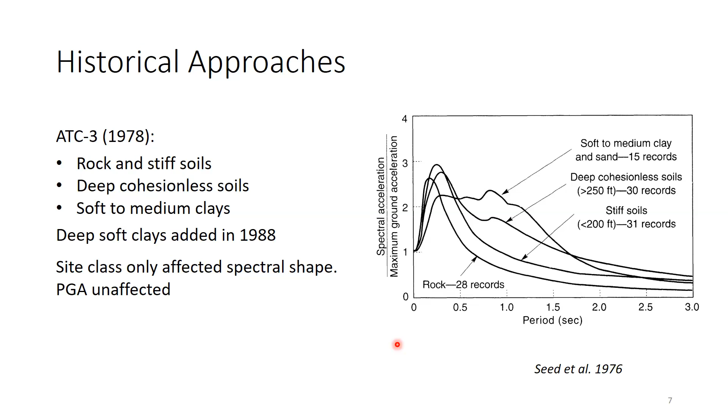A number of problems with that were understood as time went on, and a major update occurred in 1994. The Loma Prieta earthquake, which had happened in 1989, was a major motivator for revising and improving our seismic codes. In this 1994 NEHRP Provisions, VS30 was introduced into US practice.

The original idea for VS30 and the motivation for looking at it came from the US Geological Survey. Bill Joyner was a major figure here, also Roger Borcherdt. I'd like to take a moment to define VS30, because sometimes details of its definition get confused.

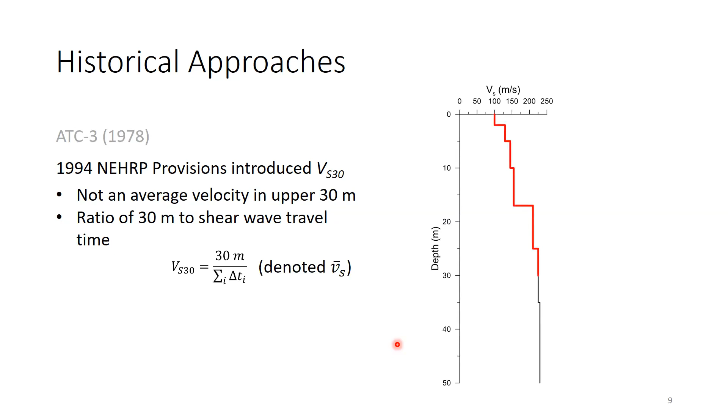It is not an average velocity in the upper 30 meters. What it actually is, is a ratio of 30 meters in the numerator to the shear wave travel time through 30 meters in the denominator. So if this is your VS profile, notice it goes deeper than 30 meters, but you basically only look at the upper 30 meters. You have 30 meters divided by the sum of the travel times through each of these velocity intervals.

If we just look at this interval, we have a shear wave velocity for that interval of thickness. The travel time through that interval is delta Z over VS. That becomes one of the travel times, and we sum it up over all these intervals to get VS30.

That definition of VS30 was very intentional. When Bill Joyner and Roger Borcherdt formulated this, they were trying to give more weight in this averaging process to the slower layers, because it's the slower layers, or the lower velocity layers, that were thought to have the biggest impact on site response.

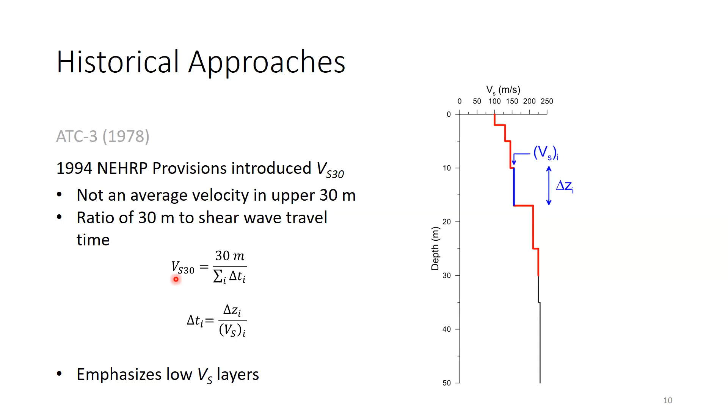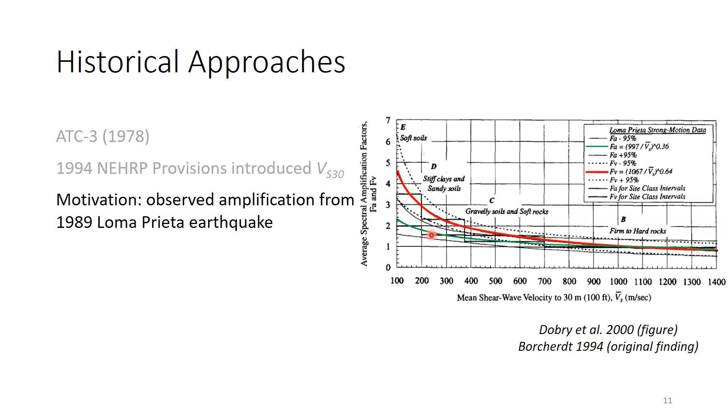As we go forward in time, we started to see ground motion models where the site amplification was based on VS30. The NGA West project produced a series of ground motion models in 2008, and a whole series of additional projects, NGA West 2, NGA Subduction, NGA East, have also used VS30 as the site parameter.

The way that site amplification changes with VS30 is called VS30 scaling. The mathematical relationship is here: you have amplification in log units, the log of VS30.

VS30 scaling is essentially the slope of this line: more amplification for soft soils, less amplification for stiff soils. The slope, when you have a log VS30 axis, is called C. The larger C is, the more negative C is, the more amplification you get.

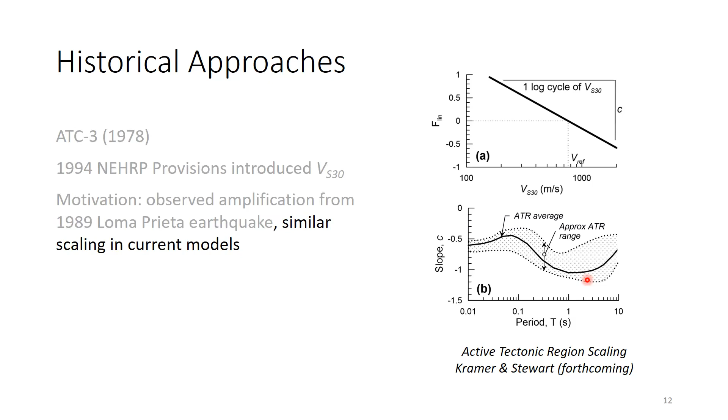This plot shows the range from different models in modern times for that slope C as a function of period. We see negative values throughout, but they are less negative at short periods, more negative at long periods—the same general pattern Roger Borcherdt observed after the Loma Prieta earthquake, even with far more data in far more regions all over the world.

Now, the way this was applied in the building code is the USGS did a national seismic hazard map for one site condition, and that site condition was 760 meters per second. That was the reference recommended by Joyner and Borcherdt. So that's what they did for the entire country, one site condition.

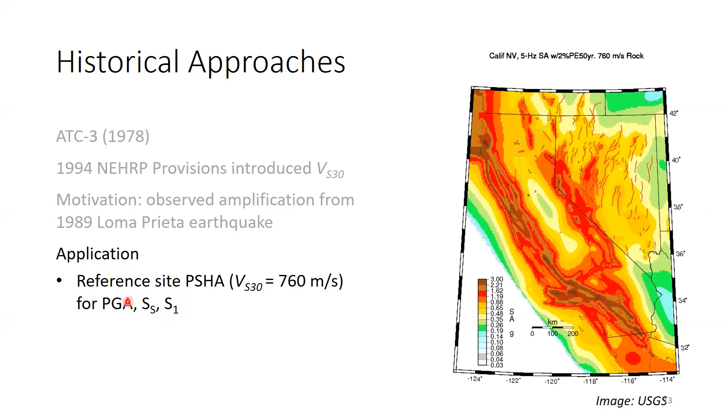You would then look up your value of ground motion from a map like this. There was one for 5 hertz, or 0.2 seconds—that's called SS. There was another one for 1 second, S1, and another one for PGA. So you get these reference site ground motions.

Then you use site factors, which were called FA and FV. These are what Borcherdt originally computed in 1994, and those site factors are linked to site classes A through E, with A being rock, E being very soft soil. This is the FA factors, and these are the FV factors.

Notice the FV factors are larger numbers than the FA factors—that's because of higher VS30 scaling. The fact that these are changing as we move to the right on the horizontal axis indicates nonlinearity. So nonlinearity was not part of the code prior to this 1994 update; it was introduced in the form you pretty much see here.

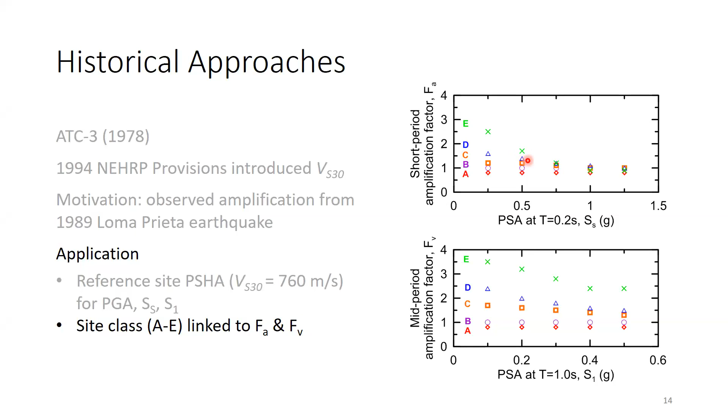In 1994, the nonlinearity was based on one-dimensional ground response analyses. So let's suppose you have 0.5 G at 0.2 seconds and 0.2 G at 1 second, and you have site class D. You would have a site amplification of 2 for FV and a site amplification of 1.5 for FA. You now can construct the spectrum.

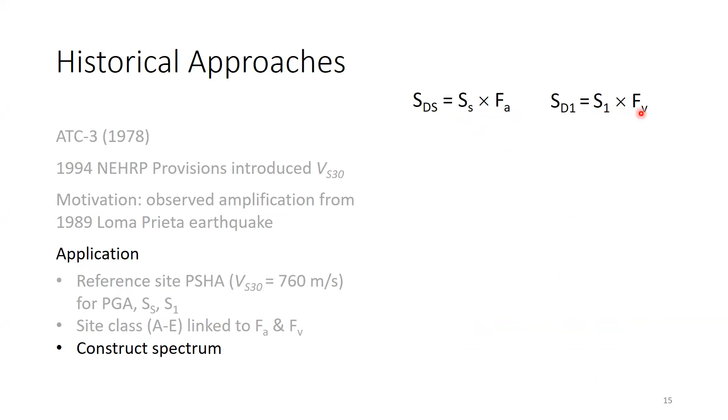You take the SS mapped by the USGS times FA, and the S1 times FV, and you get SDS for short periods, SD1 for mid periods. That allows you to construct the building code spectrum, which is horizontal at short periods—that's SDS—and comes down as 1 over T through the ordinate SD1 at 1 second.

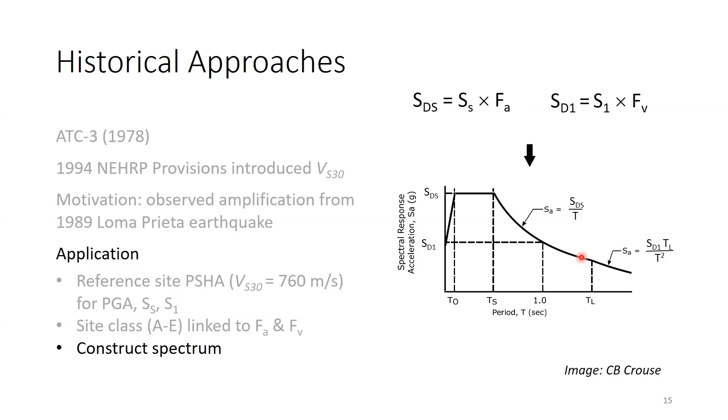That comprised the spectrum that was used, and still is actually the law of the land, until ASCE 7-22 is adopted by different municipalities.

Now, in that process, we have the site classifications A through E. This is the actual table from the NEHRP Provisions that provides that. You see A is hard rock, B is rock, and so on down to soft clay, with these different boundaries. This is VS30; the code notation is VS with a bar.

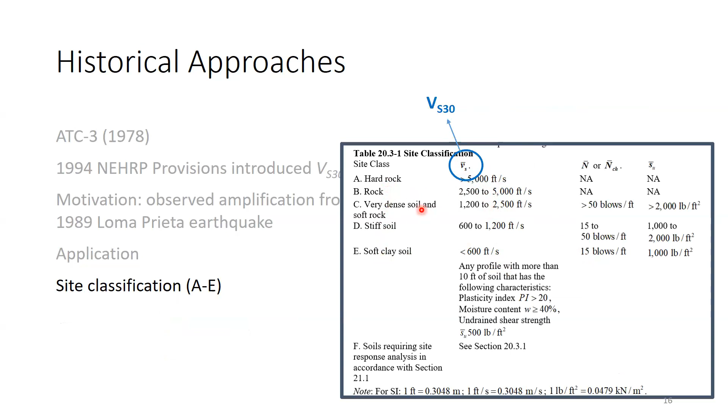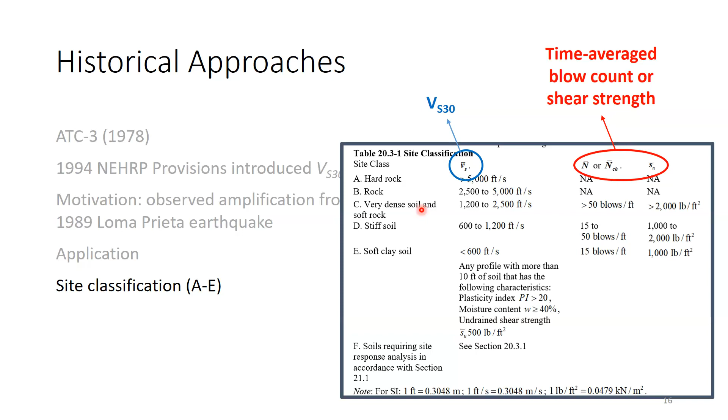But there were also categories based on SPT blow counts and undrained shear strength, and you see there's a little bar over the top. That means it is a time-averaged SPT blow count, and a time-averaged shear strength could be used equivalently to classify the sites.

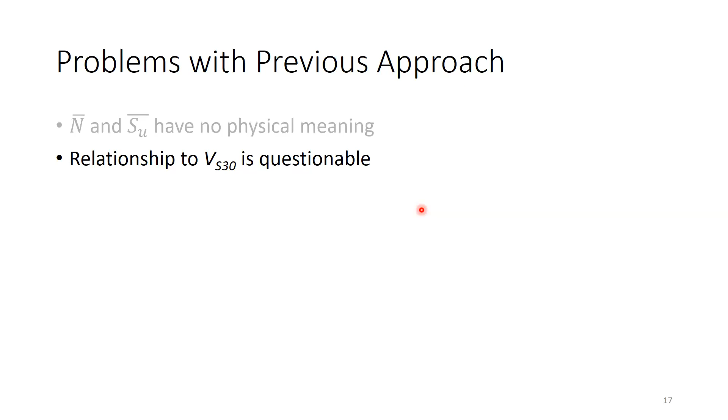So that's what it was up to the time of the updates we did in 2020. The problems we were trying to fix: N-bar and SU-bar have no physical meaning. I mean, who can explain what a time-averaged blow count is, for crying out loud? That makes no sense, really. You cannot find any literature or real justification for the values of blow count that go with the values of VS30. It's really just made-up numbers based on people's experience and judgment.

In the framework we had, if you're a geotechnical engineer, you don't need to develop a VS profile—there's no penalty for not doing it. You don't need to consider uncertainty in your site classification, so there's no penalty for not having a VS profile. It essentially serves as a disincentive for a proper site investigation. We didn't think that was the way the code should be structured.

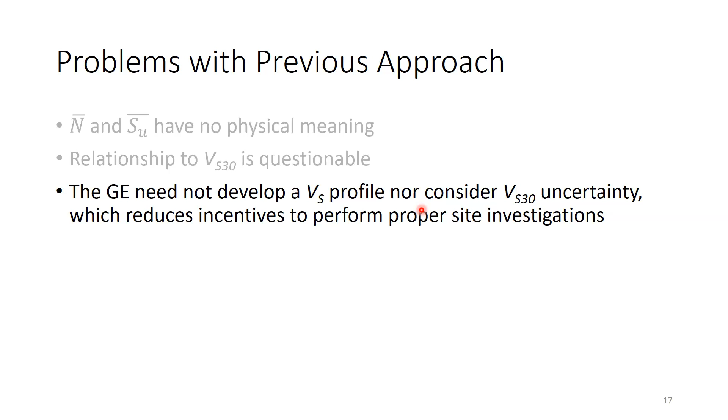So the new approach: for one thing, we introduced more site classes. That was largely motivated by the fact that the USGS went away from these simple spectral shapes—they now have 22-point full spectra.

The big change that produced a lot of pushback, but we were able to get it through, is you now actually have to have a VS profile in order to classify your site. You can measure it, that's preferred, or you can develop the VS profile from correlations, so correlations are still allowed. But at the end of the day, you have to have a VS profile in your report, and then you get the VS30 from that.

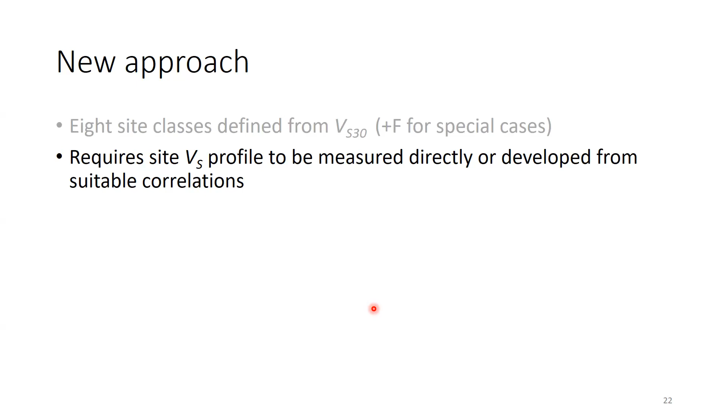Sometimes geotechnical exploration does not reach 30 meters, so we had to have provisions for how to deal with that. I know you have very similar provisions being put forward in the New Zealand code as well. If the site exploration is not 30 meters but is more than 15 meters, and the geology is such that you don't expect deep or soft soils, you can just extend the last layer down to 30 meters and get a VS30 - that's probably going to be biased a little on the low side. There are more rigorous ways of extending it that account for the gradient, but those are optional; you don't have to use them. So the least effort approach would be to just extend the final layer down to 30 meters.

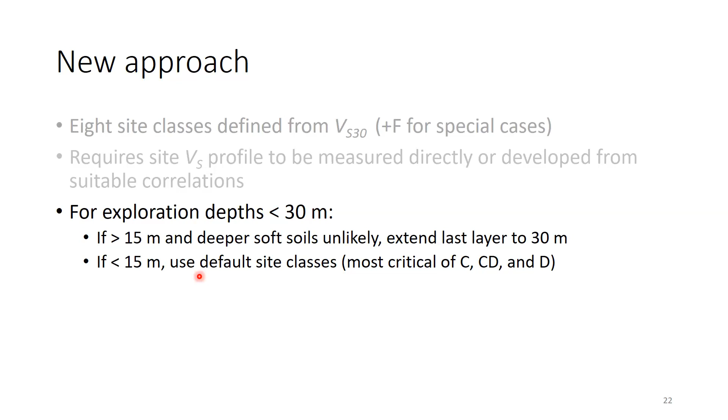If your profile is shallower than 15 meters, then you basically cannot classify your site, the way the code is written now, and you have to use what are called default site classes. So for default site classes, you have to consider a whole range of possible site classes and envelope the ground motions. Those site classes that are enveloped are C, C-D, and D.

This process also - I'll explain the details of how this works - imposes a penalty when there is uncertainty in VS30 that will produce a range of possible site classes. So even if you've done a CPT, you don't have a VS measurement, but you've done a good quality CPT and developed VS from that, due to the uncertainty in the conversion from CPT to VS, there's a range of possible VS30s and a range of possible site classes. So there's a penalty built into the process when you do it that way. The penalty is there to account for uncertainty and to encourage the measurement of VS.

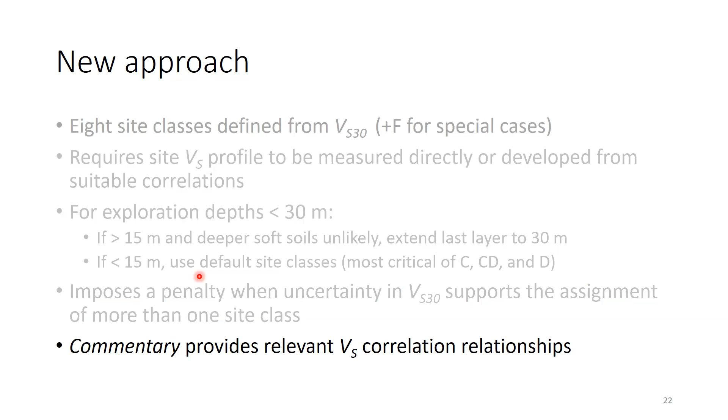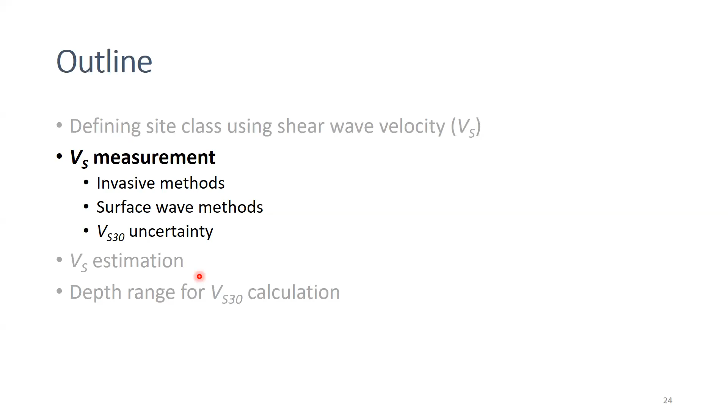We provided a commentary with a lot of specifics on how VS can be estimated from correlation relationships when it has not been measured. So let's take a moment to talk about VS measurement. I should say that what I'm going to talk about here is not in the code - the code basically says go measure it, it doesn't prescribe how you should measure it. That is left up to the geotechnical engineer. What I'll talk about are invasive methods for doing this, surface wave methods, and then I'll conclude with some remarks about VS30 uncertainty.

On the invasive methods, I think these are generally pretty well understood by geotechnical engineers, so I only have this one slide. The general types of invasive methods are downhole, suspension logging, and crosshole. Invasive just means that you are invading the ground, basically - you are penetrating the ground either with a CPT or a borehole. The graphic on the right is for the case of downhole tests, either a borehole where we use geophones or a CPT with a geophone at the bottom.

A nice way to present the results of downhole tests is to report travel times as a function of depth, like in a plot like this. Then you can draw straight lines over different depth intervals, and the slopes of those lines are the velocities. So we have both VP and VS for the arrivals of P waves and S waves in the test. That's a nice way to present the results so that the reviewer can look at how you've interpreted the data and see if they agree with your layer boundaries and slopes.

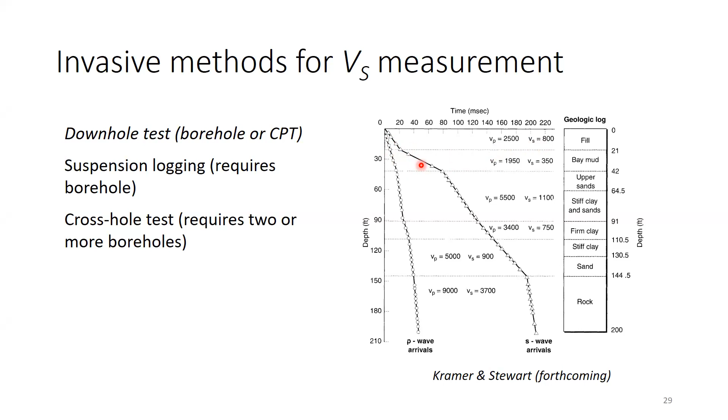What's becoming very common in California, I'm not sure about New Zealand, but in California, surface wave methods are becoming increasingly popular for measuring shear wave velocity. But the thing is, they don't actually measure shear wave velocity.

I want to emphasize what they actually do measure and some of the different methods for doing it. In the example I'm showing, there's two receivers and one source, usually shaking vertically. It's producing surface waves that travel along, and the wave arrives at one receiver before the other, with the distance s. What's being measured is a Rayleigh wave phase velocity, essentially the ratio of the spacing divided by the travel time between the two receivers.

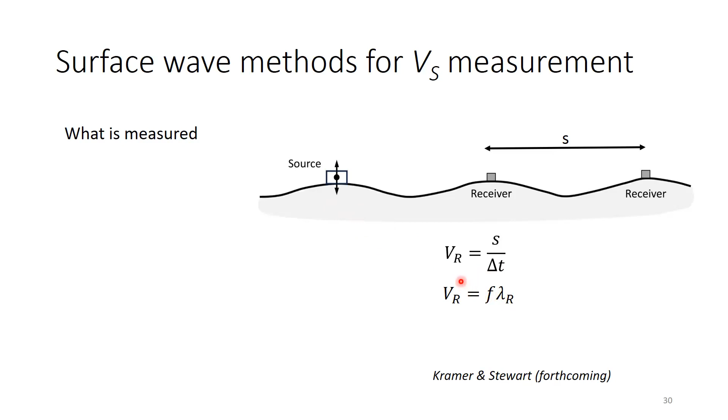That Rayleigh wave phase velocity can be equivalently expressed as a frequency times a wavelength. So if you know the frequency of the excitation and you have the Rayleigh wave phase velocity, you can calculate the wavelength. For one spacing and one frequency, you get one data point in a Rayleigh wave velocity versus wavelength plot. If you repeat this by cycling through many different frequencies and using multiple spacings of the geophones, you get a whole series of points in the space, and that is called a dispersion curve.

One of the key points I would like to emphasize is that if you're using surface wave methods, it is the dispersion curve that you're measuring, and the dispersion curve should be reported in the geotechnical documentation, because that's the measurement.

Now, there are a number of ways of doing this. My graphic was for an active source and two geophones. That is called spectral analysis of surface waves, SASW, kind of the classical way of doing this. There are more modern methods that use an active source and multiple geophones, MASW.

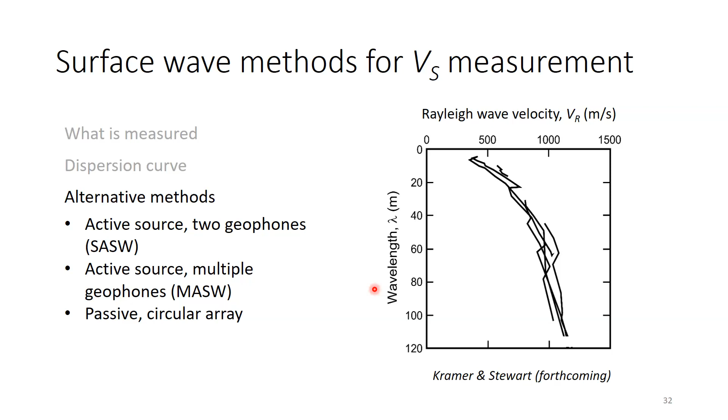And there are passive methods that don't have any source. They're usually circular arrays, and you're basically recording waves traveling across the array that can be coming from any direction. That's why you need a circular array, and those work fine as well. So there's really no problem, in the view of our working group, to use any of these methods.

There is one method, however, that is not recommended, and that is ReMi. I'm not as familiar with New Zealand practice on these things, but ReMi is a method that comes out of a group in Nevada. It's become very popular. It's a passive method with two sensors on a line, and it doesn't work very well. It can work—you can find cases where it works fine.

The problem is essentially this: if your two sensors are on a line and the wave is coming from this direction, there's no problem. But if the wave is coming from this other direction, it appears to arrive at the two sensors at nearly the same time. So it appears like the velocity is really high when it really isn't. It's just a wave directionality issue. You get around that problem by having a circular array. ReMi doesn't use a circular array.

It uses a two-geophone array in a line. If your energy is preferentially coming from a particular direction, you can't tell that's the case, and you're going to get a high velocity. So it tends to produce biased high phase velocities, and that is a problem—so it's not recommended.

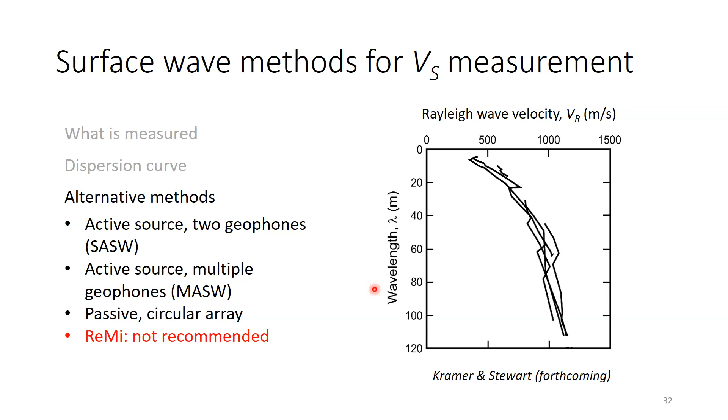The VS profile can be inverted from dispersion curves, because remember, VS is what we want, but we're not measuring it directly. So we invert it through a process that is non-unique, meaning multiple shear wave velocity profiles can be derived for a given dispersion curve. It is recommended to sample many possible profiles that would match the dispersion curve.

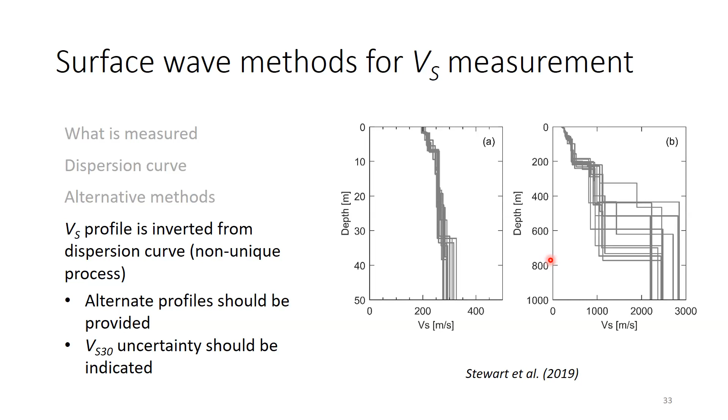That's shown for an example site here in Los Angeles. This is the same set of profiles—this one going down 50 meters, and this one down 1,000. You can see how the uncertainty grows as you go deeper into the profile. So best practice would be to show multiple inverted profiles, calculate the VS30 from each of them, and then have some representation of uncertainty.

On the subject of uncertainty, when we measure VS, there is some uncertainty in the VS30 value. The reason is that if you measure it multiple times at the same site, you get slightly different values. So if you calculate the dispersion of that, it's not zero. We were well aware of that as we wrote these provisions, but ultimately we said you don't have to concern yourself with VS30 uncertainty when you make a measurement that goes 30 meters. So there is no formal consideration of that.

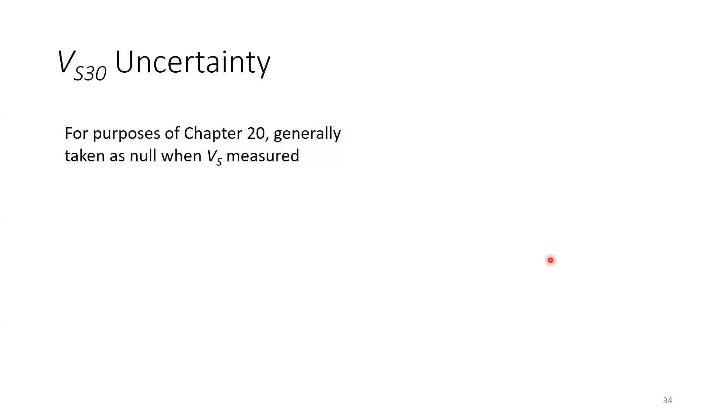My understanding is the New Zealand provisions take a different approach. There is a small uncertainty that you have to consider, but we don't have that in the US code.

We reserve the uncertainty argument for this case, which is the VS estimation. So I'm just going to go through how to estimate VS, some general concepts.

We'll talk about relationships that use penetration resistance. I'm going to skip the example local relationships because that's really California specific. And then I'll talk about the uncertainty.

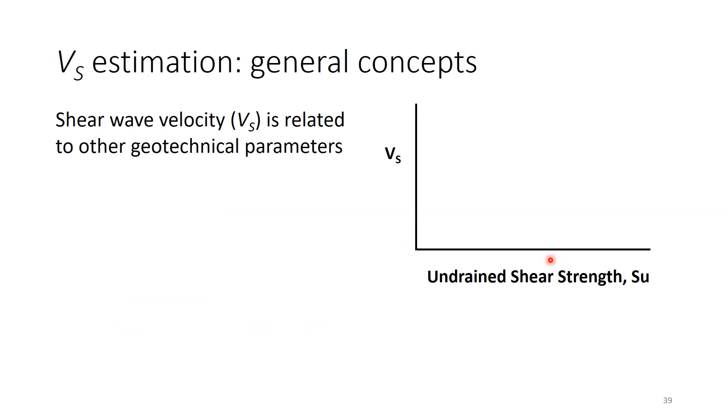VS is a soil property and it has a relationship with lots of other parameters. That gives us the opportunity to measure something else and try to infer VS from that. One of the things it's been related to in literature, particularly for clays, is the undrained shear strength.

So you might have a relationship like this for Holocene soils. We have exactly these types of relationships in California, and maybe a relationship like this for a compositionally similar material, but just older, like a Pleistocene material.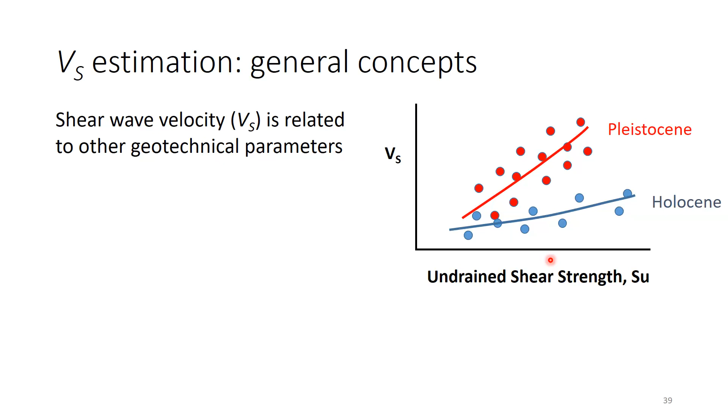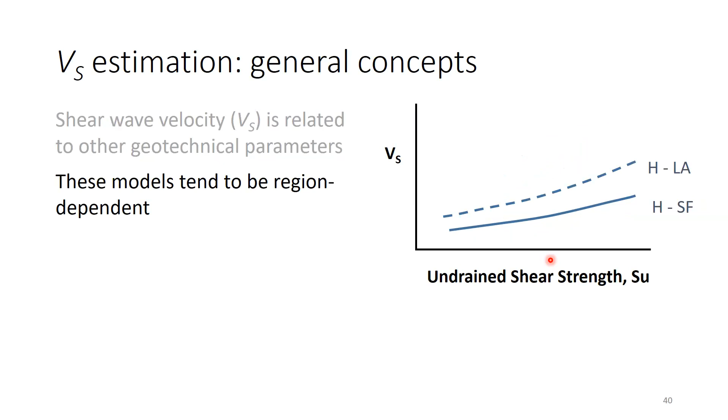These models tend to be region dependent. So we have relationships that apply to geological units in the San Francisco Bay Area, and other ones appropriate for Los Angeles, as you see here schematically.

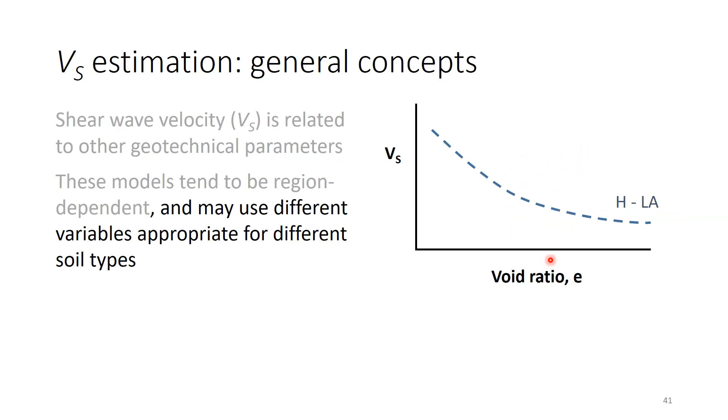Different variables may be used for different soil types. What I was showing before was undrained shear strength. We have other relationships for void ratio, for example. So you take some relationship, which could include penetration resistance-based relationships, and we estimate the VS profile.

So that's the measurements. Then we're going to come up with the VS by using a relationship that maps void ratio to shear wave velocity.

There is some uncertainty in that relationship, but what you'll see is that the uncertainty in the VS30 from these correlations is smaller than the uncertainty in the VS at a given depth.

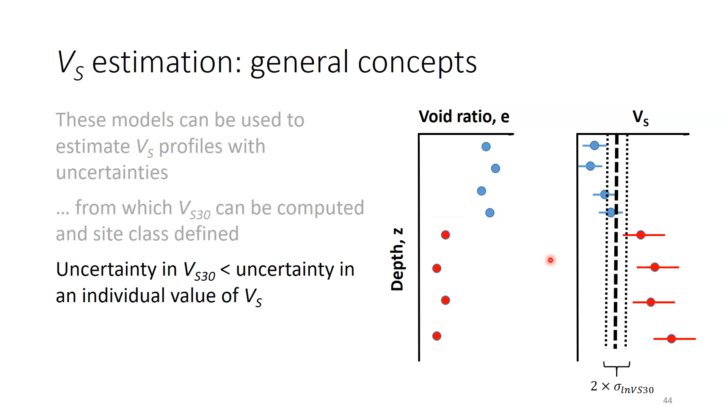So uncertainty in the VS at a given depth might be in the range of 0.15 to 0.3 or so natural log units. The uncertainty in the VS30 tends to be smaller than that because there's some averaging that goes on—maybe VS is high in one location and low in another. It kind of averages out a little bit so that we have pretty favorable VS30 uncertainties, as shown here.

So that's all very schematic in general. In the commentary of Chapter 20 of the NEHRP Provisions, in commentary documentation, we have some specific guidance on inferring VS from penetration resistance.

This is kind of a very general form of the equation that you can find in a whole series of modern relationships. We have the natural log of the VS, a coefficient, a second coefficient that scales the log of the penetration resistance, a coefficient that scales a term related to depth,

and then we have an error term over here. So: natural log of VS, penetration resistance—that would be like N60 or tip resistance normalized by atmospheric pressure. It is not overburden corrected.

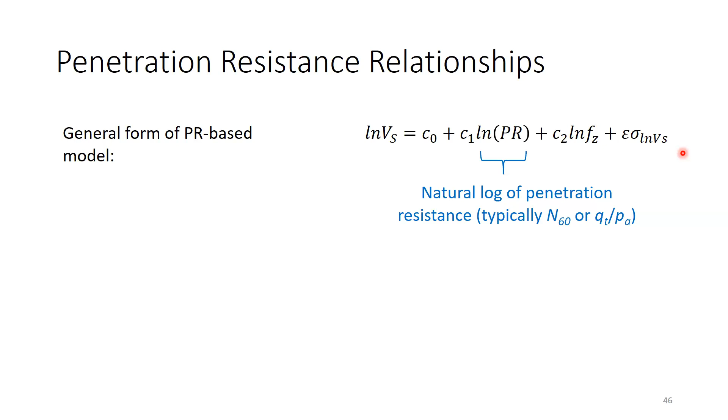The modern relationships will not apply an overburden correction to the penetration resistance because that comes in separately through the C2 term. The way that, say, blow count changes with overburden is not the same as the way shear wave velocity changes with overburden. That's why we have to have a separate term in here.

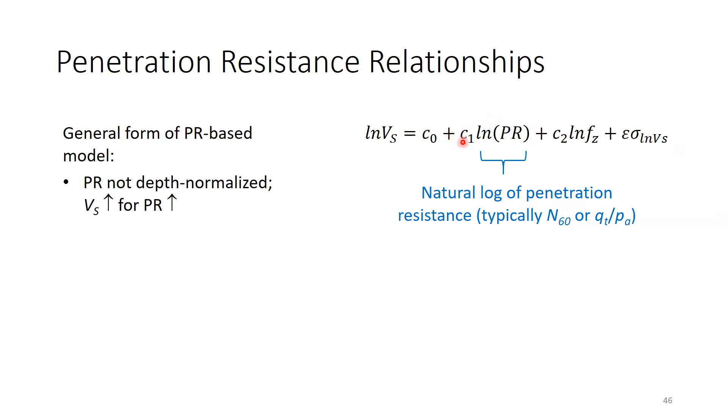Let me just go back. So the shear wave velocity will increase with increasing penetration resistance, so the C1 term will be positive.

VS will also increase as overburden increases. This overburden can be depth, effective stress like sigma V prime, or mean effective stress. As this goes up, shear wave velocity will go up, so C2 is also going to be positive.

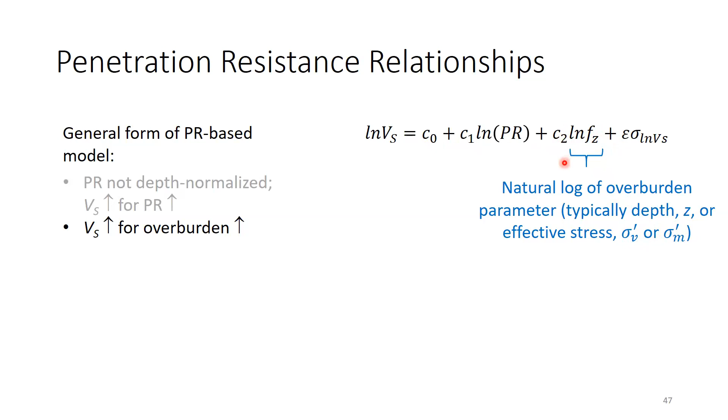This epsilon is just the standard normal variate. So if what you want is the mean, you set epsilon to 0. If you want the mean plus 1 standard deviation, you set epsilon to 1. The sigma is the uncertainty in the relationship. So the relationships are going to give you C0, C1, C2, and sigma so that you can apply it.

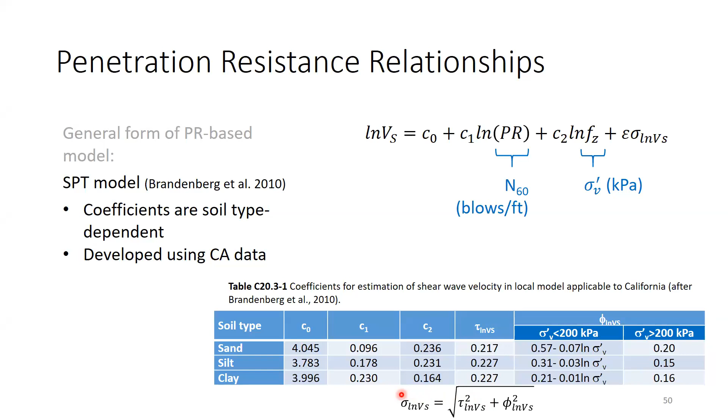One such relationship developed using data from California bridge sites is Brandenberg et al. 2010. That relationship has each of these coefficients dependent on soil type, so sand, silt, clay each have different coefficients. These are different kinds of error terms: one is the uncertainty within a borehole, and the other is the uncertainty between boreholes, broken out differently. The two uncertainties are combined through SRSS to get the overall uncertainty, sigma ln Vs.

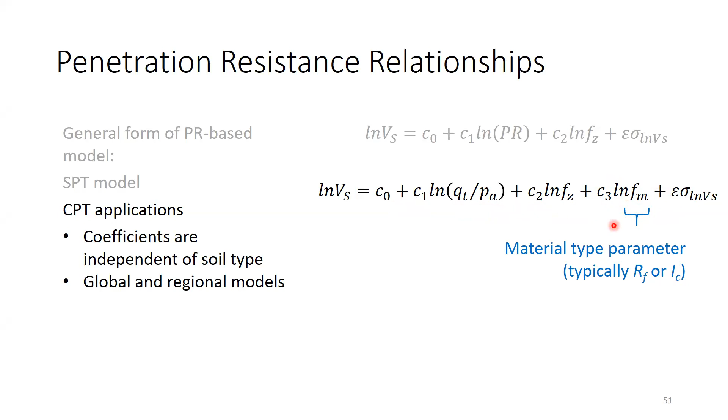In New Zealand, CPT is super popular, and it's pretty popular in California as well, so probably for the most part these relations will be used with CPT data. In that case, this equation is written a little differently. The main thing that changes is this term here, which brings in soil type. In the SPT relationship, soil type came in through the coefficients themselves. In the CPT version, those coefficients are fixed, and soil type comes in through this term instead. That FM term is a material type parameter, which can be friction ratio, IC, or something like that. Otherwise, it's constructed the same way.

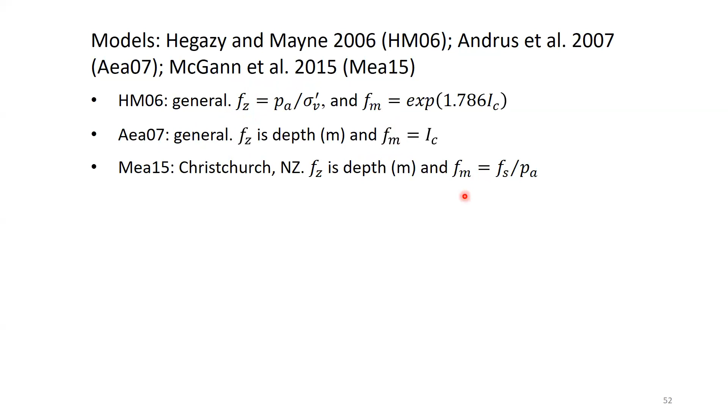These are several models that we specifically referenced and provided. We essentially took the coefficients the authors provided and presented them in this uniform framework I just described. One is Hegazy and Mayne, another is Andrus et al. 2007, and one is a model from New Zealand, McGann et al. 2015. This shows what depth term and soil type term the different models used, and this is the summary table of the coefficients for each model.

The note at the end is just how they treat uncertainty, and basically most of them don't. Note A means it doesn't exist in the model, but note B for the McGann model describes different uncertainties for different depth ranges.

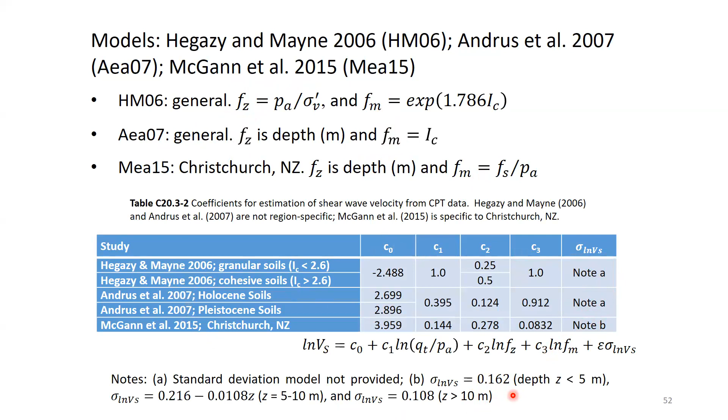So we have VS30 uncertainty. It's considered in the assignment of site class when VS profiles are estimated and not measured. We needed to provide some guidance on this subject for practitioners using these correlations. The way this was approached, we accessed a couple of different studies from the literature that had considered what the VS30 uncertainty is when it's estimated with correlation relationships.

There was one study done in Japan, where they developed specific relationships for Japan to get VS, then used those to come up with VS30. Same thing in California, these two models use similar functional forms. The Japan model also considers geologic age, so it's like the Brandenberg model I showed, but with geologic age considered in the coefficients as well.

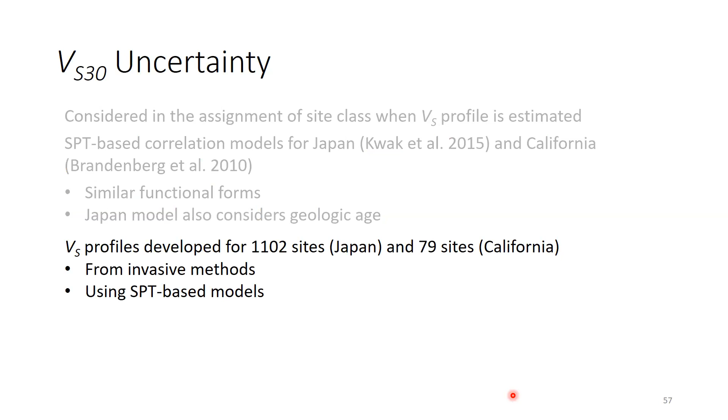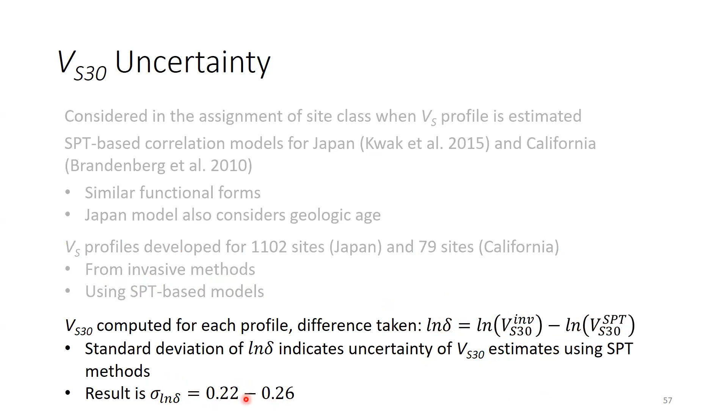Essentially, what was done in these studies was you take sites where you have a measured VS, calculate the VS30 from the measured VS profile, calculate VS30 from the estimated VS profile, and then look at the statistics of the differences. So you have those two sets, and we calculate the difference, which is this natural log delta here - it's the invasive-based VS30 minus the SPT-based VS30. What we find is that the sigma on these things is pretty close between the two studies, 0.22 to 0.26.

That motivated this clause in the building code, section 20.3. I'll just read it: due to the uncertainty inherent to such correlations, site class based on estimated values of VS30 shall be derived using VS30, VS30 divided by 1.3, and 1.3 times VS30 when these correlations are used. If these different average velocities result in different site classes from the site class table, the most critical is used for a given period. So what that basically means, as I'll illustrate, is you have to envelope the spectra for the three site classes, if there are three.

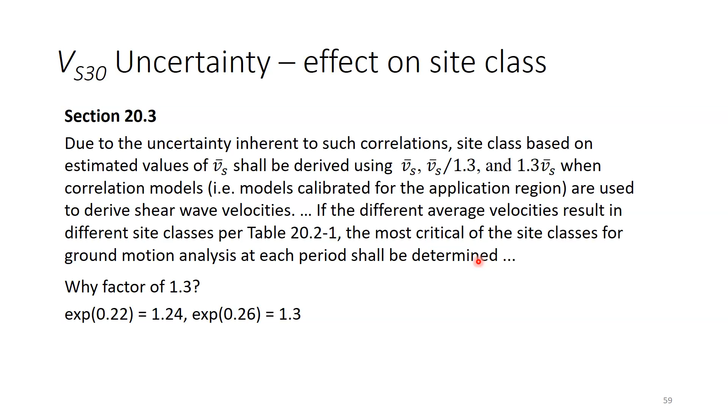Why is the factor 1.3 here? Essentially, if you take the exponent of 0.22, you get 1.24. If you take the exponent of 0.26, you get 1.3. So 1.3 seemed like a reasonable characterization of these results from the literature.

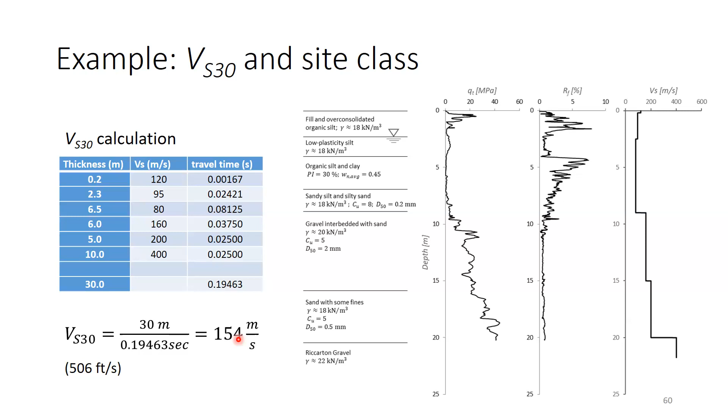To give an example of how this works, this is a CPT profile - QT, friction ratio, VS over here. So you have the different thicknesses of layers, the different VSs. These are travel times, and this is the sum of the travel times. So 30 meters divided by that is 154 meters per second, 506 feet per second. That, in our table, is site class DE, since 154 is between 150 and 210.

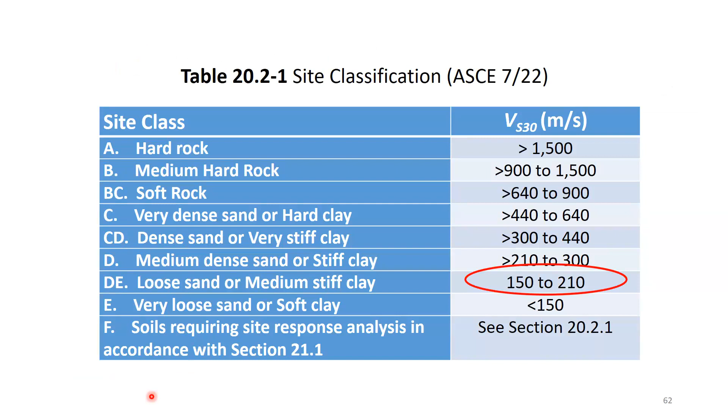However, this is a specific thing we have in our site class - I don't know if you have this here, I think maybe you don't. We come back to this log again. You'll notice there's a very soft organic silt and clay layer with a high PI and a fairly high water content. Being a soft clay, there is a criteria for site class E that says, regardless of the VS30, if you have more than 3 meters of soft clay - and in this case there's 3.5 - then it would actually be reclassified as class E.

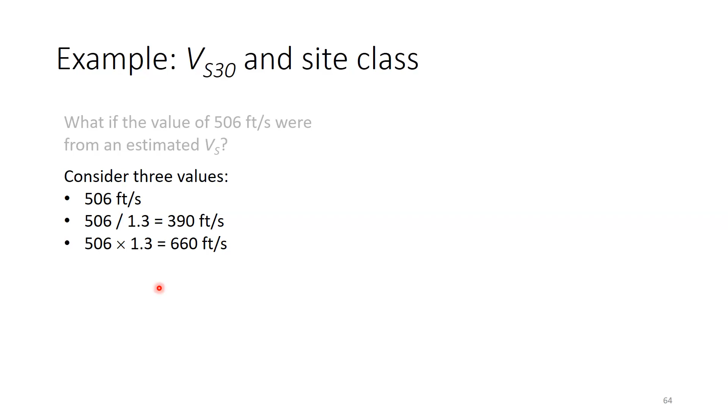Let's suppose it is DE, and suppose the 506 value came from an estimated, not measured, VS. The rule I described earlier means you'd have to develop spectra for 506, and for 506 divided and multiplied by 1.3, since those velocities lead to different site classes. Ignoring special provisions for class E, the classes based on these velocities would be DE, E, and DE, so DE and E.

So we would develop multiple spectra, one like this for DE and one like this for E, and we would envelope them. That means at every period, you take the maximum value from the two individual spectra. That imposes a penalty inherently in that process by being conservative and enveloping.

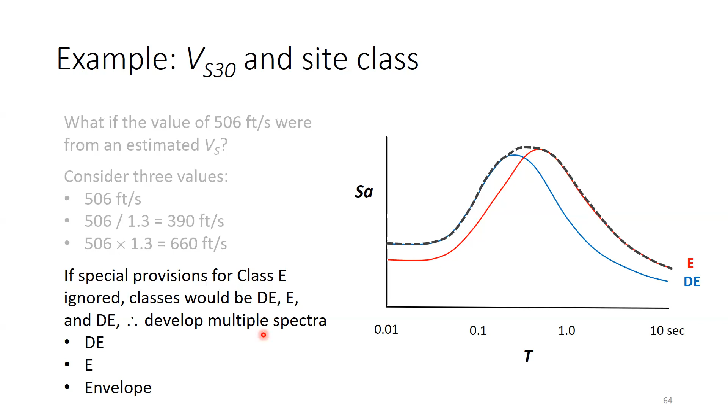The last topic I'd like to discuss, and this is the pitfall I referenced earlier, is the depth range for the VS30 calculation. I'll talk about what the provisions now specify, why this change was made, ground motion estimation for basement levels in buildings, which is where this becomes an issue, and application of site-specific procedures.

What the provision states, with some language specifically added in 2020, is that the site soil shall be classified in accordance with Table 20.2-1 and Section 20.2 based on the average shear wave velocity parameter. That's all the same as before, which is derived from the measured shear wave velocity profile from the ground surface to a depth of 100 feet or 30 meters. This is the key part at the end.

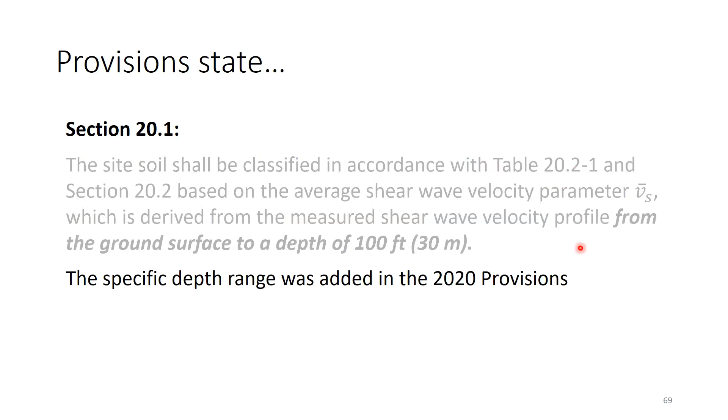That specific depth range was added in the 2020 provisions. So the obvious question is, why did we feel the need to define that depth range when that has always been what everybody has taken it as? Going back to Bill Joyner in 1992, all the way to the present, any model that uses VS30 always uses that definition. Seems kind of obvious. Why did we have to state the obvious, basically?

Well, one reason we felt we had to do it is that the 0 to 30 definition is what is used everywhere, like I just said. Going back to the origins of the parameter, there has never been any other definition of VS30 that has ever been used in any kind of scientific literature.

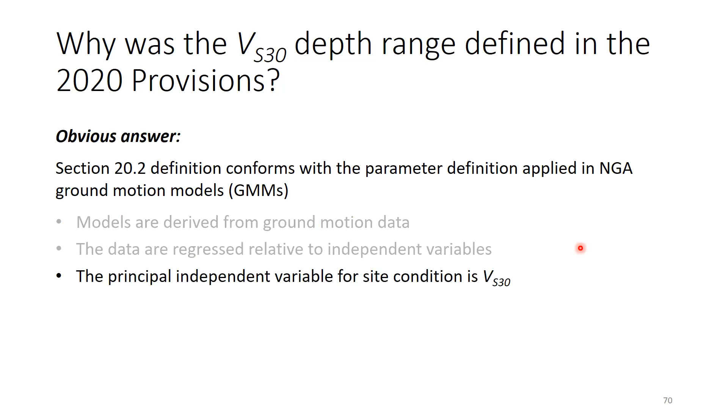If that's the definition, and you have ground motion models derived from ground motion data, and those data are regressed against independent variables, one of which is VS30, the principal variable representing site condition is VS30 in these ground motion models. So where does that VS30 come from that goes into the ground motion models? Well, it comes from VS profiles in some cases, and those are VS30 from 0 to 30 meters.

It is also from proxy-based relationships. In other cases, proxy relationships are where you only have surface geology, for example, and you use that to estimate VS30. Those proxy relationships are based on measured VS profiles, where the VS30 is taken from 0 to 30 meters. I know I'm being a little redundant here, but I'm trying to drive home the point that the ground motion models we're using to predict ground motion use VS30 defined a particular way.

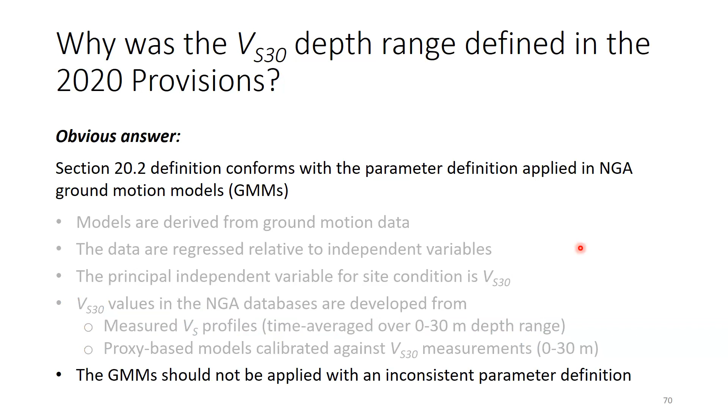And so they return values based on that definition. You should not apply them with a VS30 that is derived using a different definition. That's essentially the issue, and that's kind of the obvious reason why we should use 0 to 30 meters.

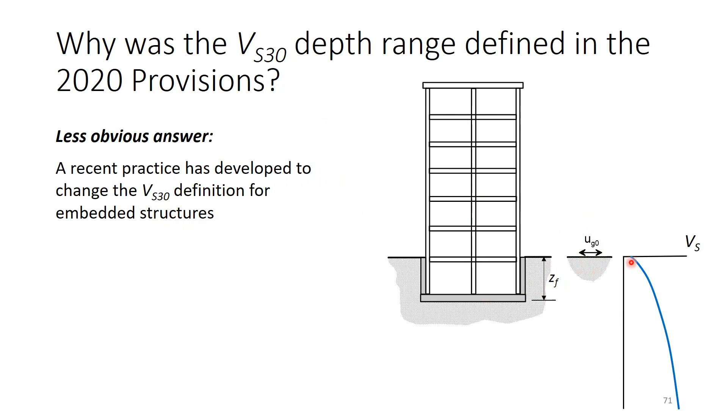The less obvious answer, which is the source of the problem, is that recent practice has developed in California, and probably elsewhere — I know it occurs in Seattle, Portland, places like that as well — to change the VS30 definition for embedded structures. So here's a structure, it's embedded at a depth ZF. This is the motion we're trying to predict, and this is the VS profile for the site. So if that's 30 meters, that is your VS30.

The recent practice is to take the starting depth at the base of the foundation, go 30 meters down from that, and use that to get VS30. In order to avoid confusion, I'm going to call that VS30 star, because it's not really VS30—it's this modified version, measured from foundation depth to foundation depth plus 30 meters.

The stated intent of the practitioners who do this repeatedly is to define ground motions applicable at the foundation level of the structure. Their argument is, nobody cares about the ground motion up here—what we want is the ground motion down here, so we use the VS30 from that depth downward. If you don't think about it too much, that makes sense. That is the base of the structure, after all. Why don't we just use that?

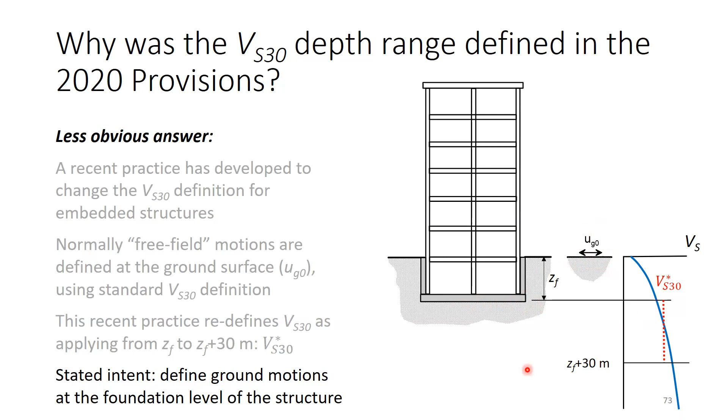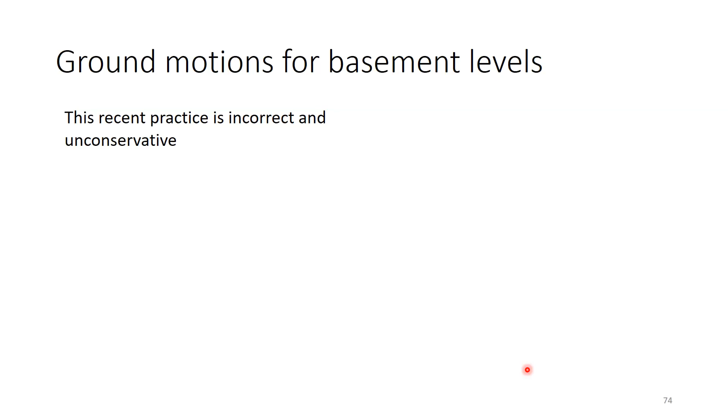Well, I don't usually use language this direct and rough, but here it is: this practice is incorrect without any qualifications. It is incorrect and it is unconservative. Let me explain why. When a GMM site factor is used, it is based on VS30 from the standard definition.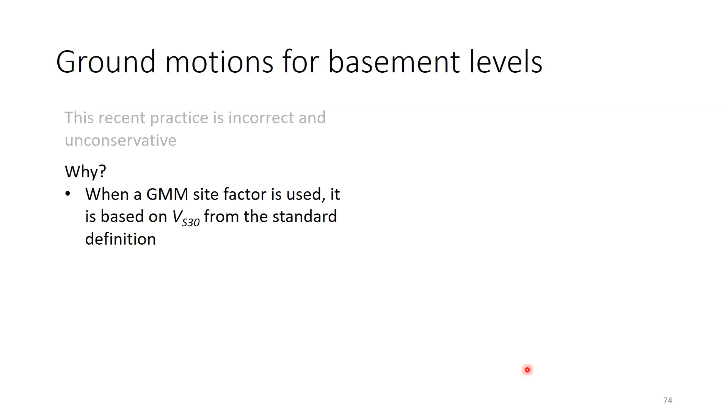The point is that what you get 100 meters down, 300 meters down, even a kilometer down in these deep basins, has a correlation with VS30. That's important because while 30 meters does not control site response for very long wavelength ground motions, due to that correlation to the deeper structure, VS30 does have predictive power.

As I explained earlier with Roger Borcherdt's results and the more recent results, in fact the VS30 scaling—this is kind of a paradox, but it's there in the data—is much stronger at long periods, where the wavelengths are much bigger than 30 meters, than it is at short periods, where the wavelengths may be close to 30 meters.

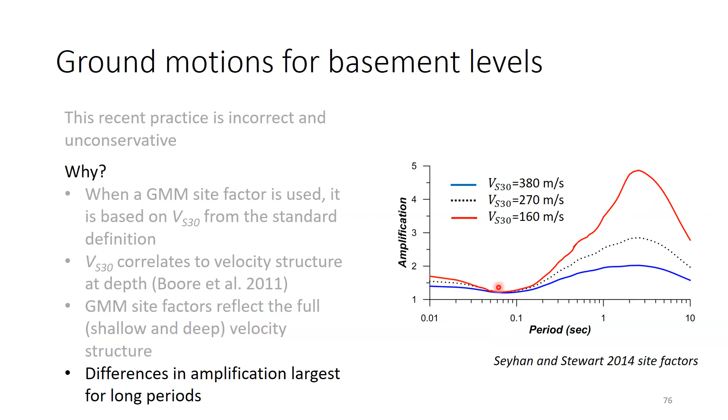That would not be the case if it weren't for this very strong correlation. Here's an example for 160: look how much stronger the amplification is out here at 2 seconds than it is at short periods. These differences in amplification are largest at the long periods.

Okay, so let's now look at it a slightly different way. VS30 star is going to be greater than VS30 almost all the time, because of velocity gradients increasing with depth. So if this is VS30, this is VS30 star—a bigger number.

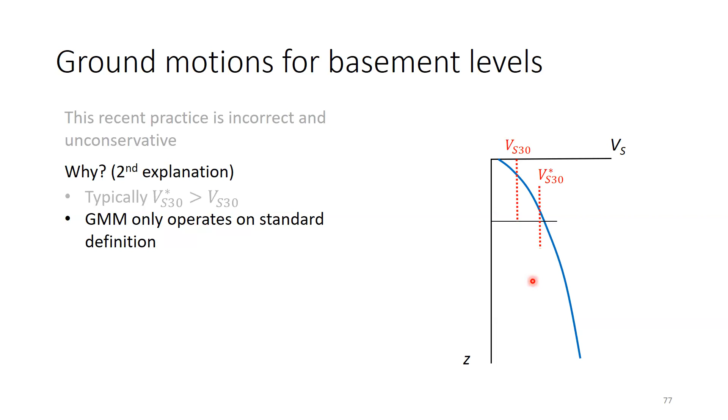Again, all the GMM knows is the standard definition. You could make a GMM based on a different VS definition if you wanted to, but we don't have GMMs based on that—we only have GMMs based on the standard definition. So if you plug in a different VS30 than the actual VS30 for your site, the GMM is going to think you have a different site than the one you actually have.

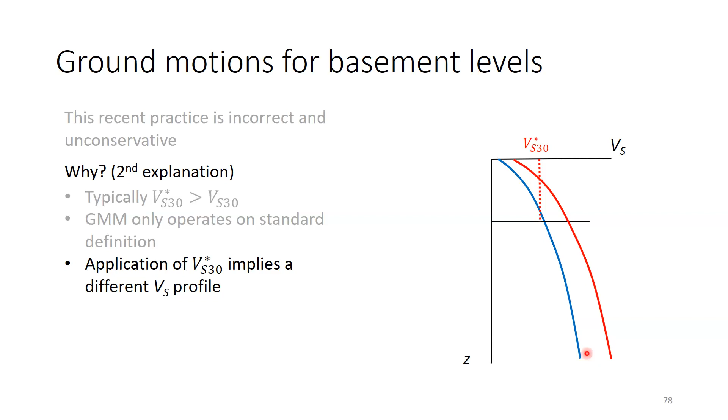So what the GMM is going to think is that this red profile is what goes with VS30 star. And as we see, it's quite different, even at large depth. So the different profile is going to have a reduced site response than the real profile, and the difference in site responses is going to be most pronounced at long periods.

So if this is the spectrum you'd get using the site response for VS30, this might be the spectrum you get when you use VS30 star. So what consultants are doing is getting the red one when the real ground motion should be the blue one.

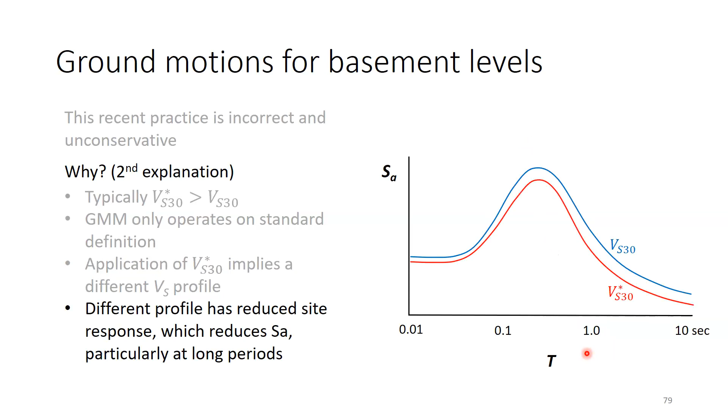So we put the specific definition in there to hopefully make this practice go away. Now, the consultant's argument that we don't care about free field ground surface motions, we want motions at the base of the structure, is a very legitimate concern. There is nothing wrong with wanting to do that.

Modifying VS30 is just the wrong way to get to your objective. The right way to get to your objective is there are several possibilities. One approach is you apply your site factors within the GMM using the actual VS30.

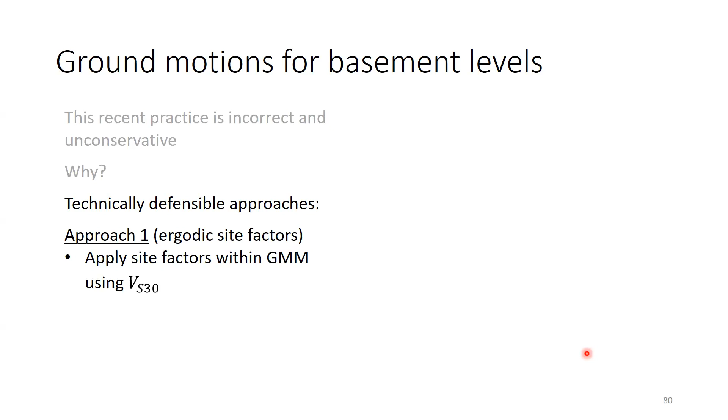So there are relationships for this that are in the literature. They're also in different chapters of the building code that you can use. This is essentially what they give you: a transfer function, where as you go to larger values of period, or shorter wavelengths, larger values of frequency or shorter wavelengths, this transfer function ordinate goes down to a lower bound of about 0.5. So that's a legitimate way to reduce the ground motion.

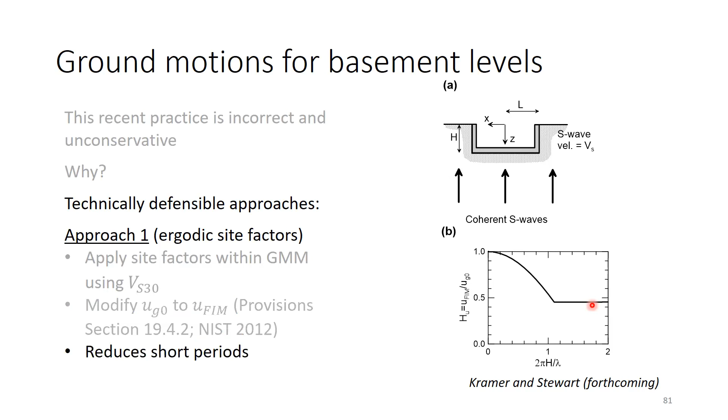It's going to have virtually no impact at long periods, and it's going to have a reduction at short periods. Notice what I just said: it'll have virtually no impact at long periods. That's exactly the opposite of what the VS30 redefinition does, which has the most profound impact at long periods. This makes a really big difference for tall buildings. So this is reducing the short periods, but not the long.

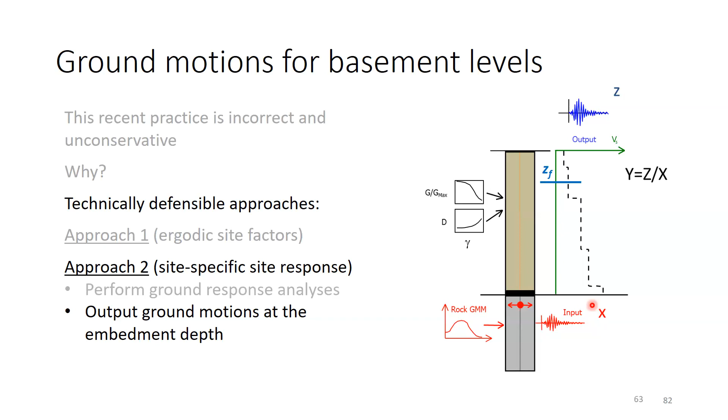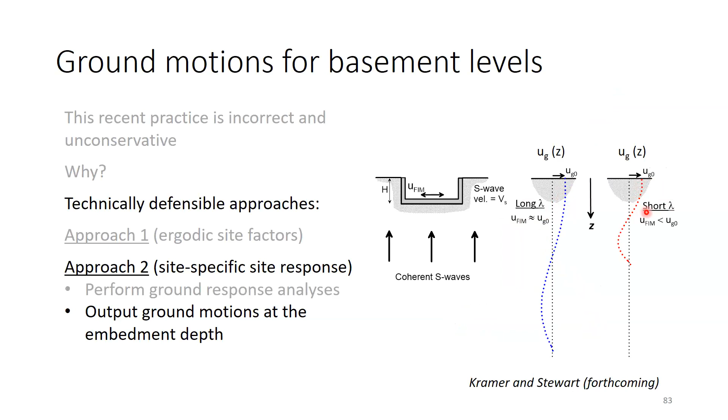A second approach is if you're running ground response analysis, taking waves and bringing them up through your site with a code like DEEPSOIL or something similar, you can certainly do that, and you can output the ground motion as an outcropping motion at the depth of your foundation. That'll be a different ground motion than if you carried it all the way to the surface. Conceptually, this is basically the same thing as the soil structure interaction approach. It's just more specific to your site because it includes your site-specific profile. And that, again, will produce virtually no difference at long periods, and it will produce a difference at short periods.

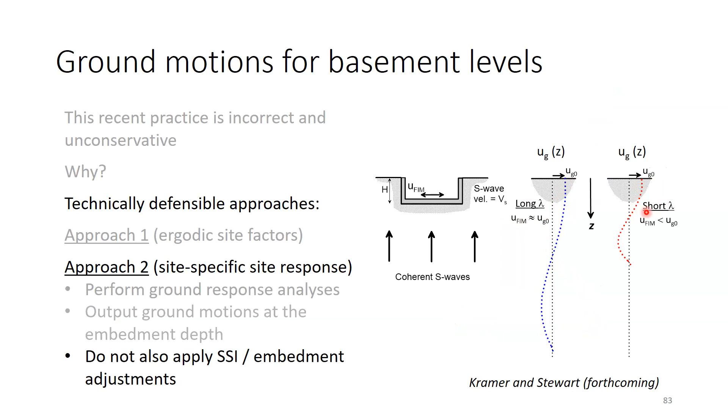If you do this approach, which is allowed in the code, you should not also apply the SSI adjustment, because there are basically two ways of doing the same thing. So you do it one way or the other.

Okay, so I'm going to wrap up now. We've had pretty major changes in ASCE 7-22 and the 2020 NEHRP provisions. Many of what we put into these documents are in your document. I have read your document, and I see a lot of the same language. So a lot of what I've talked about did carry right over into the New Zealand standards.

So we have site classes that are now defined solely based on VS profiles, with Class E and Class F exceptions. As far as I know, you're doing the same thing. You don't have blow count-based site classes. You don't have undrained shear strength-based site classes. When the VS profile is estimated, uncertainty in the resulting VS30 is considered in assigning the site class. You're doing the same thing, in fact, in an almost identical way to the way that we are doing it.

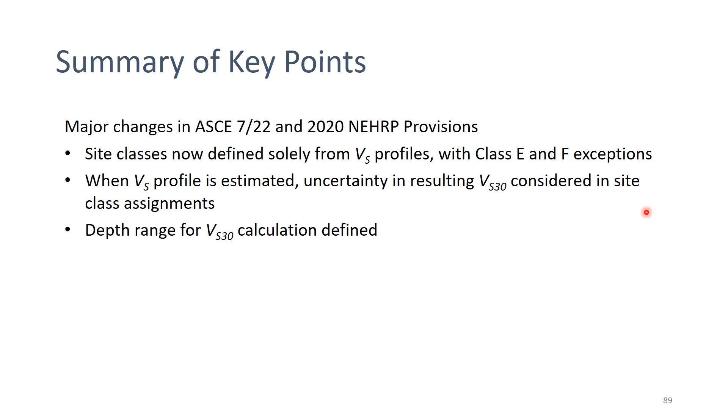The depth range for VS30 calculation is defined. This was a big deal for us for the reason I just explained. You just say it's 0 to 30, which is fine - that is what it is. And hopefully you don't go down the path of having bad practices as we have had, because once you start down a path like that, it's very hard to reverse course and change things.

When we put this out, the way this process works, which is also the way your process works, we put it out there. There was a public comment period. We got all kinds of objections. Those objections said requiring a VS profile is way too complicated for simple projects, that we were being too academic in our approach in requiring all of this.

And there was pretty strenuous disagreement with not allowing VS30 star. The way that our process works is people can say whatever they want. We're going to consider it, hear the public comment, talk to folks. But in the end, the people on the committee, for better or for worse, decide whether it's persuasive. We found these arguments to be non-persuasive. So the provisions, as I just described, are in the NEHRP 2020 and also in ASCE 7-22.

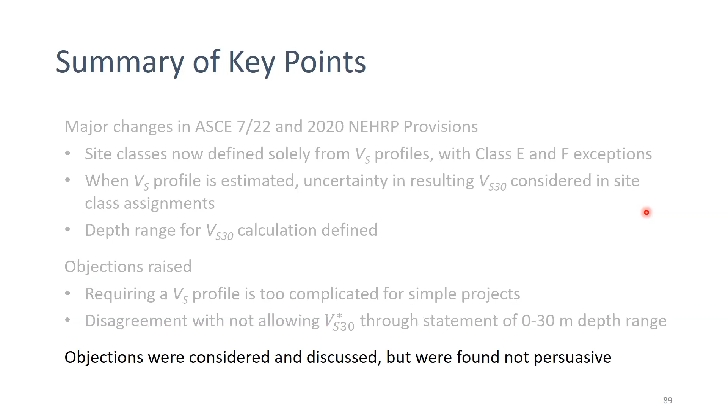So that's pretty much all I have to say. I wish you the best of luck as you venture into the wonderful world of VS30 and start using it for your site classifications.